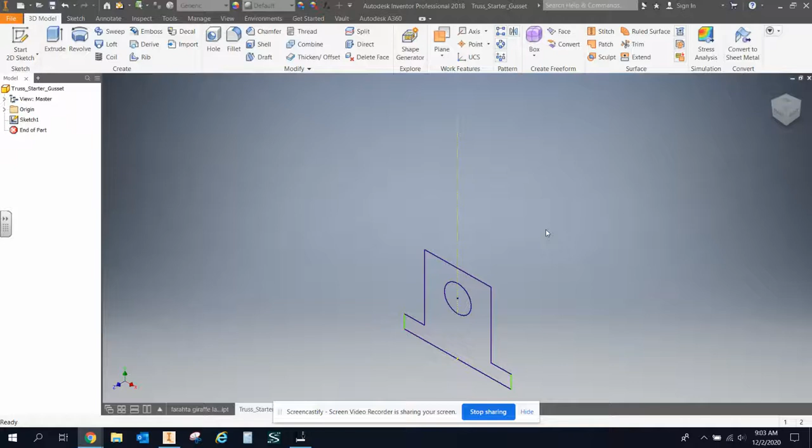Alright, here we go. We're going to go ahead and make this truss really simple in Inventor, but we're going to start with the starter gusset.

First thing I want you to notice is don't start a new sketch, edit the existing sketch. So we edit that sketch, we go into the sketch, and one of the keys is you've got to make sure your truss is long enough, okay?

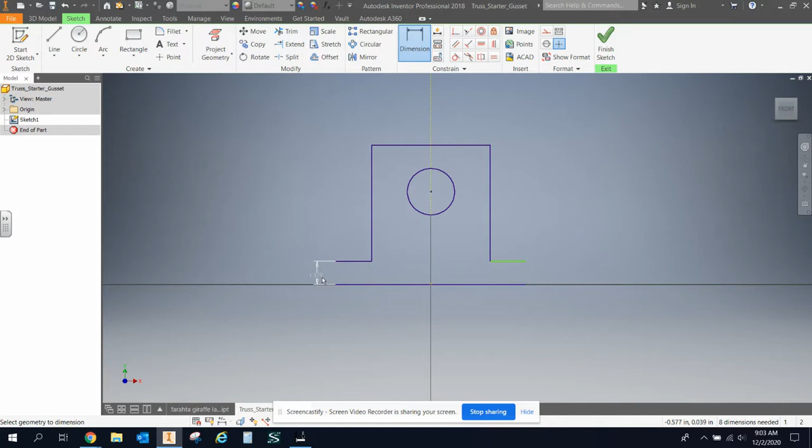But first I'm going to delete these two lines here. Clearly I'm going to delete these two lines. And I want you to notice also that if you dimension this, the distance from here down to this line is going to be 1/8 of an inch. That is the maximum thickness of any member thickness you can have. You can make the members thinner than that, but no thicker, okay.

And we know that this bottom line needs to be 5 inches long. So we can come in here and we can just come to the end of it and go out here. And actually what I'm going to do is I'm just going to get rid of that bottom line. I'm just going to draw a line down here that's 5 inches long. So I'm going to make that 5 inches.

And then I'm going to go ahead and make this point here at the origin coincident with the midpoint of this line. And then that will snap it so that it's right in the middle. Okay, now that's 5 inches long.

I don't want to be any shorter than that, because if I'm any shorter than that, I might not be quite long enough to rest on the two beams. So maybe really what I make that is like 5.1 if you want, or I think just leaving it at 5 is probably okay.

Alright, so then I go back to my MDSolids. I think of what this is going to look like. Okay, I come back into Inventor, I start drawing my shape here.

So I come up, and really before I start drawing my shape, what I want to do is put points in. So I'm going to put a point in up here, and another point in up here. And I'm going to dimension them to the right spots.

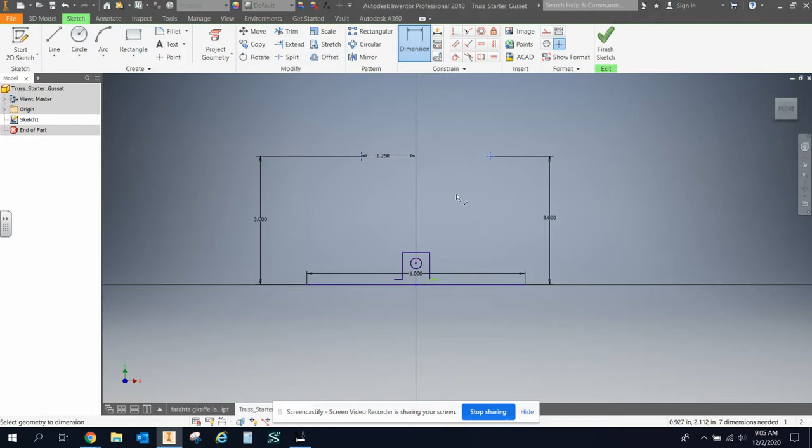So from this midpoint, this dimension is 1.25, so it's half of that. And then for the height, it's going to be 3 according to my thing, and then for this it's going to be 3 again, 1.25 from middle horizontally. Okay, 1.25. Alright, now I'm going to draw my lines in.

I come out to the end of my truss, I go to that point, I go to this point, I come down to this point, and then now you really got to decide, do you want to go to this center point? Do you want to come all the way down to here? Do you want to do some point in here? This is where you have to decide how you want these members to go.

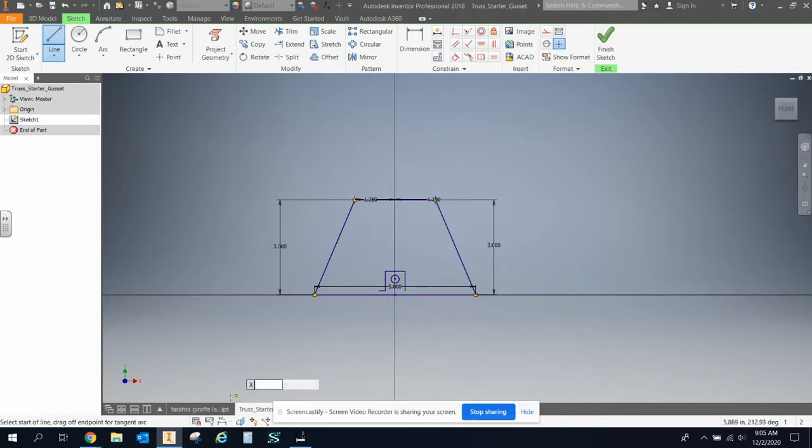Because in MDSolids, they're coming down to this exact bottom point, but we have a circle right here on our Inventor model, so most people probably want to go down in here somewhere. So I'm just going to come down to here and then stop there and then go back up to here. And then if you want, you could locate where this point is, you could just dimension this spot here to be 2.5 from there, which it is, that's good. And maybe from here it's 1/8 of an inch up, and then it's in its spot, okay.

Now, this starter gusset, you cannot get rid of the outside of this, right? And you need to start offsetting these things. So then now I could bring my lines, I could extend this out to here, right?

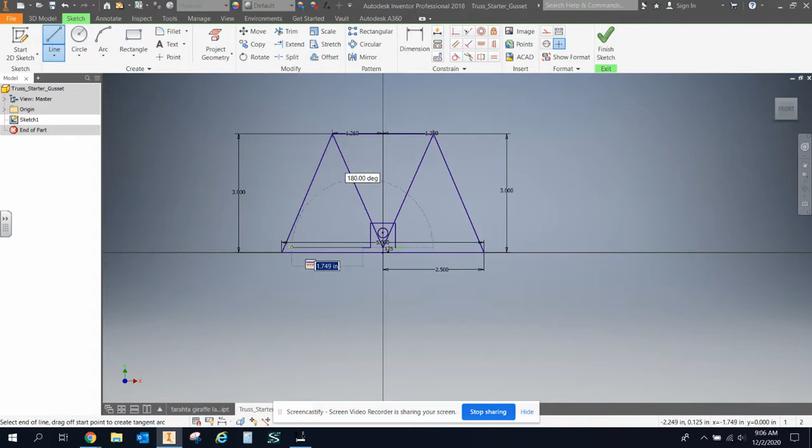Now, at this point, honestly, what a lot of people do is this. They go offset. So you come up here to the offset tool, and maybe you offset this in like that, right? And honestly, when I did that offset, I probably should have, I just undid it. So I'm going to delete that line that I had made.

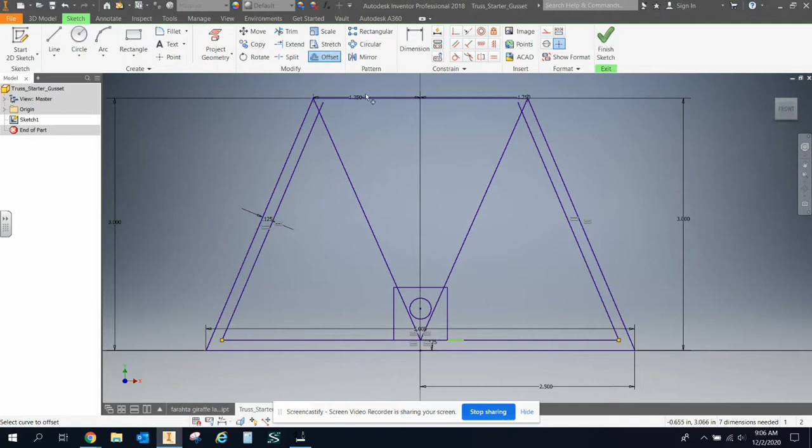I'm going to offset this, and when I offset this in, I'm going to offset it 0.125. It makes it go in 1/8 of an inch. And then I'm going to offset this in 0.125 and offset this in 0.125, right?

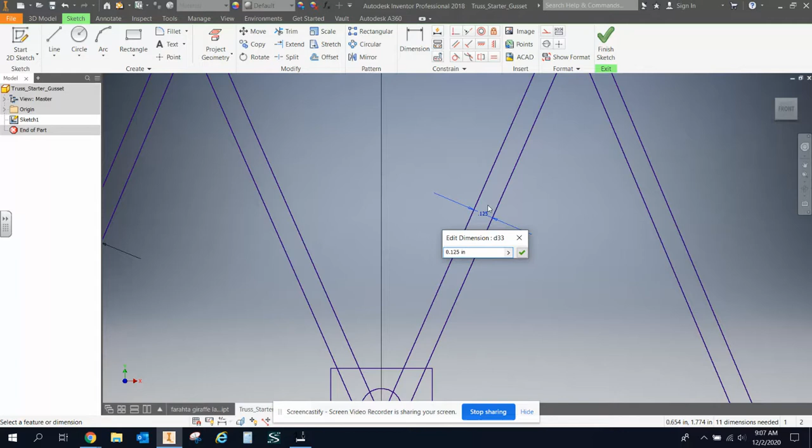Now, if you're like, oh, but wait, I wanted this to be the center of my line, then instead of making this 0.125 for this last offset, I should have made this 0.125 divided by 2, and then you also offset it the other way and do 0.125 divided by 2.

Okay, now you come in and you can just start deleting or trimming things. So we can delete this, or we can just get rid of its visibility potentially. So we stop offsetting, we could delete this line, right? We could delete, and then we can delete this line too.

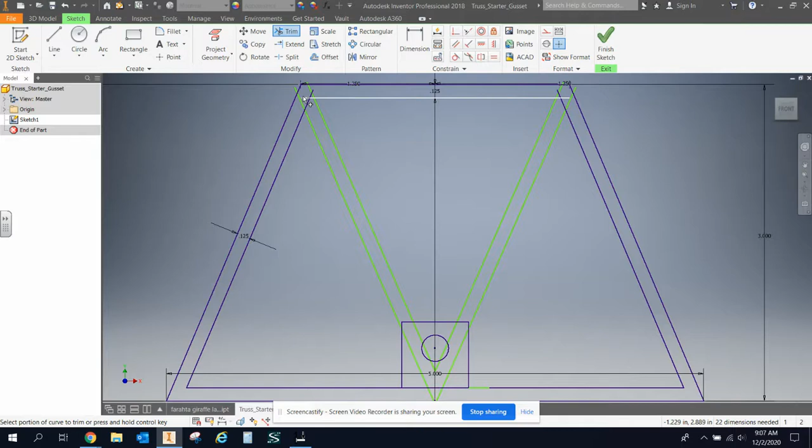And then now we can come in and we can just trim a whole bunch of stuff. So trim, trim, trim, trim, trim, right? And I zoom in, I trim this because this is an intersection here, right?

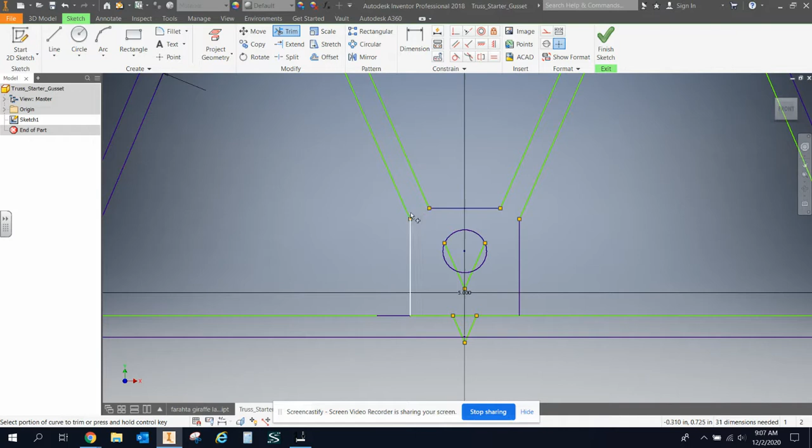Okay, and then now I come down here and I need to trim this stuff on the inside, obviously. Need to trim those. But again, I got to keep the outside of my starter gusset there. We got to keep that gusset shape in there, okay.

And then these are lines that got created because of the offset, and then I need to trim that, of course. And then you've got a basic truss. You do some more trimming and things like that. So those are some basic ways to do it. There are other ways to do it, of course, but that would be one way to do it with the offset tool and the lines.

Again, you've got to make sure that this is...